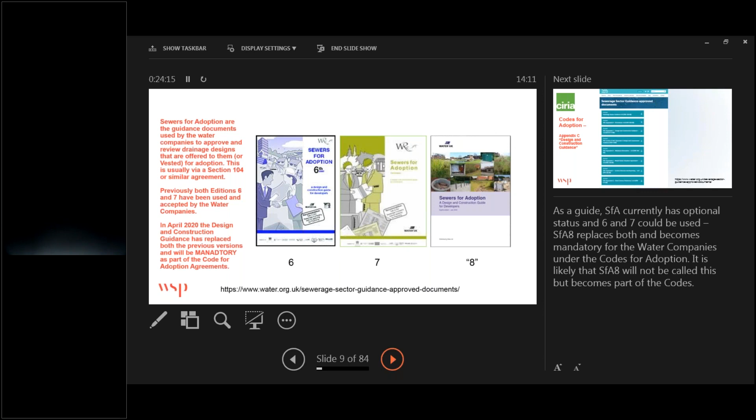If we go on to the next slide, sewerage sector guidance includes a whole raft of documents. The DCG, Design and Construction Guidance, is Appendix C of the suite of documents, and in particular we're concerning ourselves with Section C of Appendix C of the sewerage sector guidance. So there's quite a lot of background information beyond what we're talking about today. Next slide.

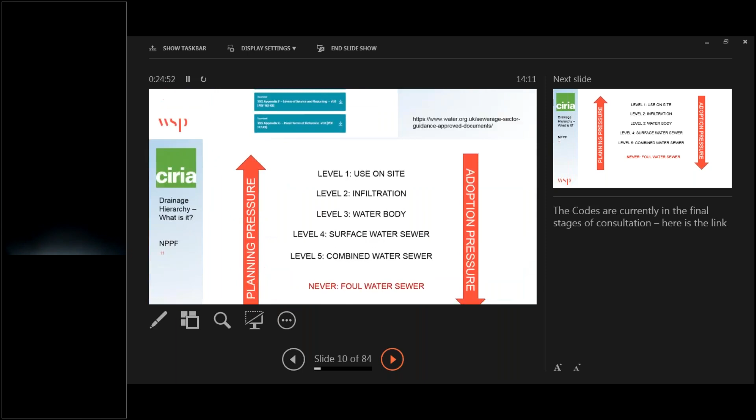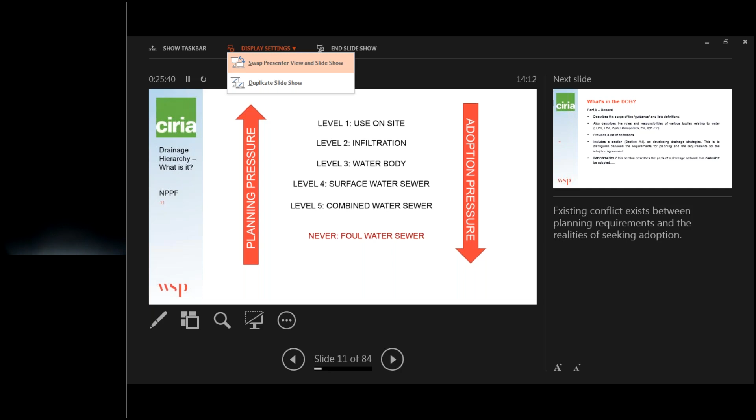What we've tended to have, because of the lack of Schedule 3 applying to England, is a mismatch between the NPPF and what planning is gearing itself to deliver on sites in terms of sustainable drainage, versus what can actually be achieved through adoption and agreements and divesting the assets. There's always been this two-way pressure: sustainable drainage leans towards reuse on site and source control, trying to keep the water close to where it falls and on the surface, whereas the adoption criteria, Sewers for Adoption 6, 7, has generally dealt with subsurface systems, generally pipe systems. So what we're trying to do now, and what the DCG has recognised, is that sustainable drainage should be part of that surface water management criteria.

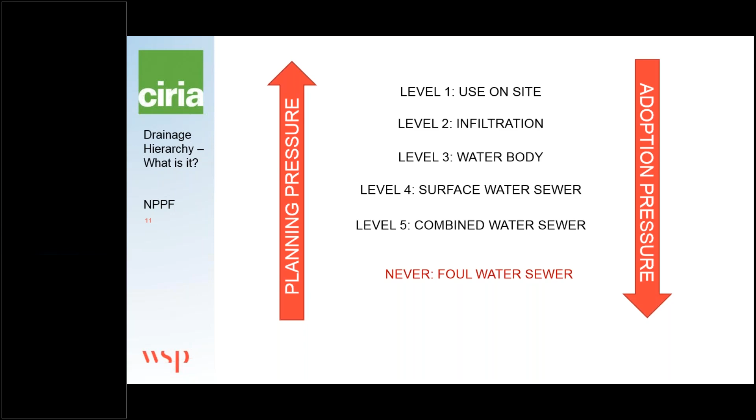So on the next slide, please. I'm going to jump through a few of the key headings that I've taken out of the DCG, just to give you a flavour of what's changed, and in particular how it's relevant to sustainable drainage.

One of the key aspects is that, unlike 6 and 7, the DCG is now going to be mandatory for all water companies. Some of you may not have been aware that 6 and 7 were still only guidance documents - they weren't necessarily mandatory, although they were probably applied in a mandatory way. The DCG is mandatory, but the process of offering your site for adoption is still the voluntary element. So there's still a gap there which we need to fill.

What the DCG starts to roll out is this idea of a collaborative approach to surface water management, and it sets out in Part A the collaborative roles of various entities, such as the lead local flood authority, the local planning authority, the water companies themselves, the Environment Agency, IDB, etc. It also stresses that the lead local flood authority may be the lead definer in some of the characteristics of the drainage network, rather than the water company side of things. So, for instance, the discharge rate from a site is more likely to be dictated by the lead local flood authority rather than as part of an adopting network system, and that's recognised within the DCG.

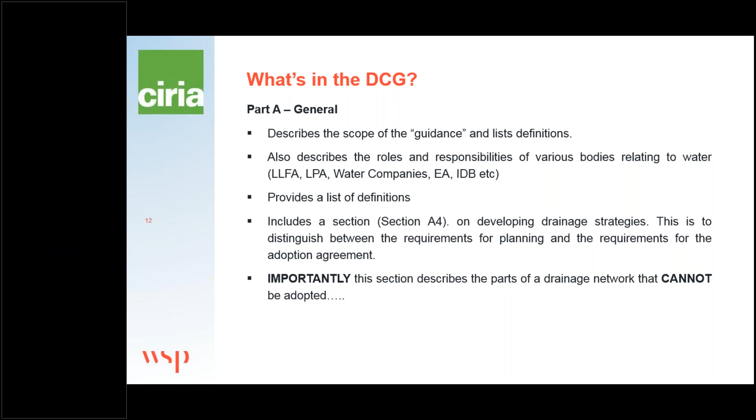One of the hurdles that had to be overcome quite early in the process of trying to look at sustainable drainage, in terms of what was originally Sewers for Adoption, was how can you define a SuDS element as a sewer. So what Water UK and all the partners were not going to do was redefine the definition of a sewer and change the legal definition within the Water Industry Act. It was a case of looking at SuDS elements in terms of how they can be applied or considered to be a sewer. This is quite important going through the whole DCG, as it gives you a framework, but it also highlights some of the potential limitations of what could be adopted.

So the next slide, please.

In line with the legislation and the historical context of the DCG, elements such as highway drainage are still the same as previous adoption criteria. So basically, the water company is not obliged to take on a purely highway drainage system. It's handled via agreements, and as many of you may know, it'll be through a Section 278 or Section 38 highways agreement that the highway drainage would be worked out, and that may connect to an adoptable drainage network but not be part of that network. Similarly, land drainage has never been a function of the water companies, and therefore, similar to groundwater, is something that is not normally permitted into a public sewer system.

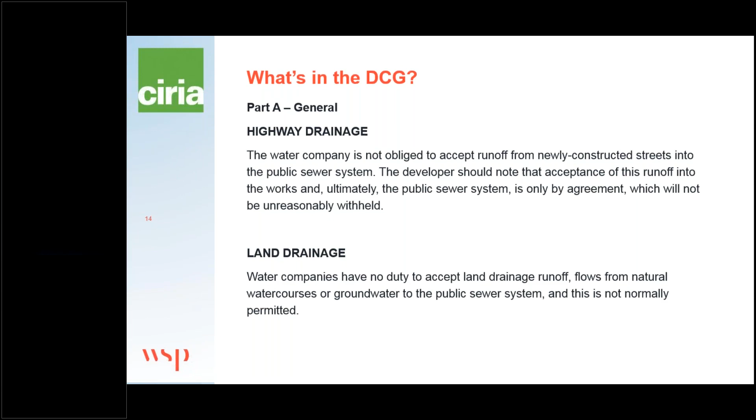In line with the definition of a sewer, there are essentially four components. One is that it has to drain buildings or the local hard-standing areas that go with those buildings. It has to have a defined channel that you can easily comprehend, not necessarily see, but at least know where it's going, its size in a way. It conveys and returns flows to a sewer, or to a surface water body, or it ultimately discharges to groundwater. And it has to have an effective point of discharge which has the lawful right to be there. For instance, you can't just discharge a pipe into a watercourse if you don't own that watercourse or have any rights to it. So these are the items that, to be a sewer, you must be able to tick off all of these going forward.

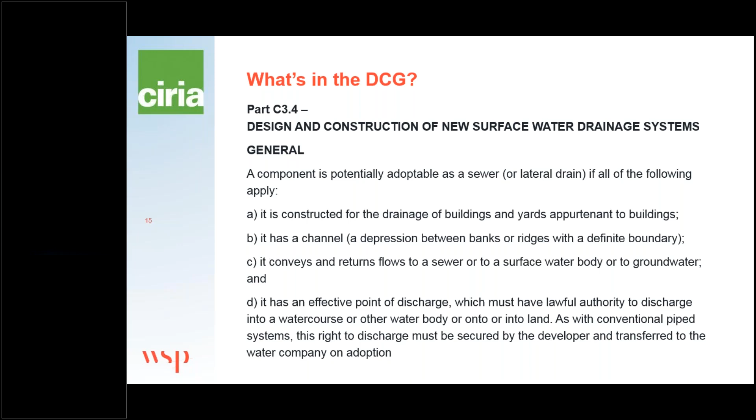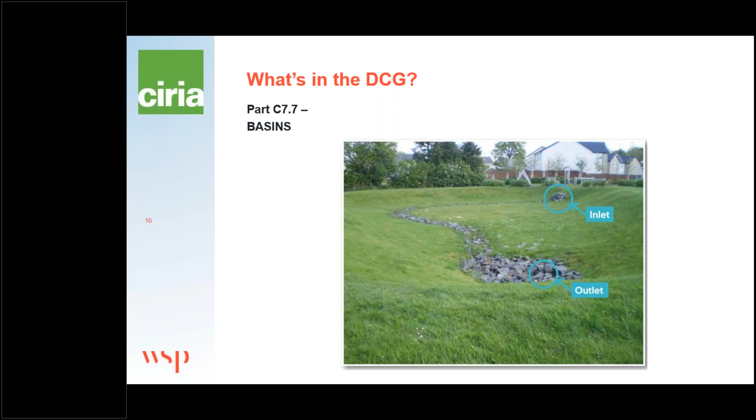Within the DCG there are a number of sections similar to Sewers for Adoption, and I've extracted this one, specific to basins. This is something new that a lot of you will find quite interesting, and I personally think it improves the way surface water is managed immensely compared to previous examples: basins can now be adopted in their entirety, including the inlets, outlets, flow controls, and the entire area of the basin where any storage above or below ground is contained. This is an important step change in sustainable drainage.

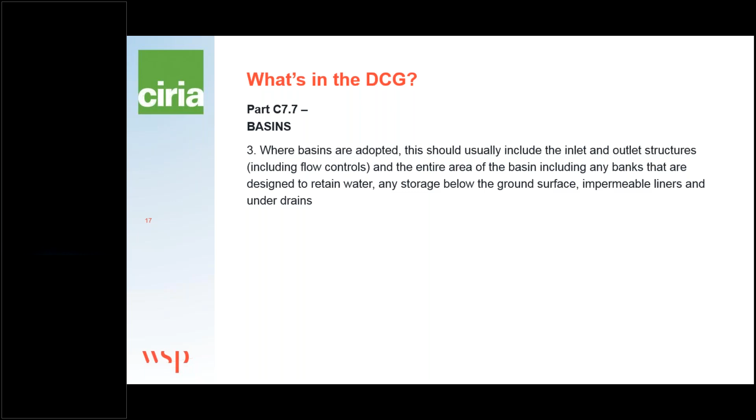As a quick example, many of you may have seen where basins were provided, but in an offline manner. In a Section 104 application, you may have shaded or applied for the adopted route to be, in a sense, a bypass of the basin, acting as the low flow route. Most low intensity storms would go through that network, and in some cases the network may even be designed for a 1 in 30 year event, meaning the basin is hardly ever used except for extreme events.

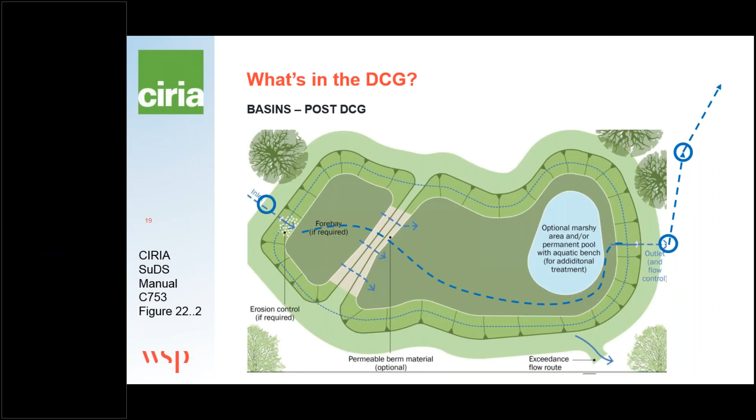What the DCG is now offering is that the basin becomes an integral part of the network, and you can now pass flows through it for every event. This means you can achieve interception volumes and water quality improvements on every single rainfall event. You get these losses in the system, improving downstream capacity issues, and making the most of the basin you've got in your network.

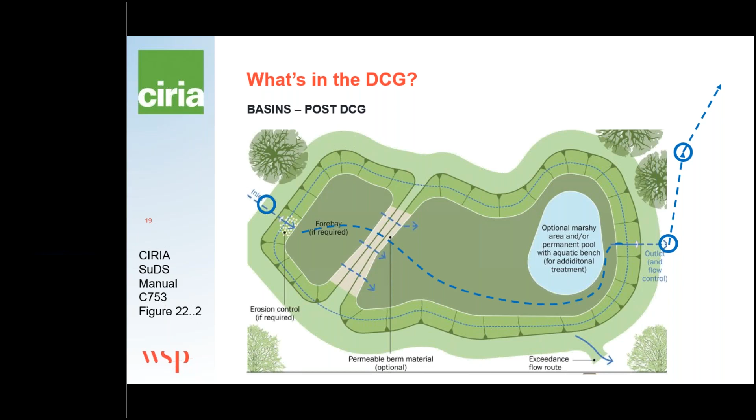There are components that cannot be adopted and fall outside of the SuDS definition, also listed in the DCG in line with previous definitions. Anything that is a watercourse as defined, including a main river, streams, or ordinary watercourses; anything mainly dealing with drainage of land or of a highway; anything to do with groundwater; and anything within a private curtilage, such as an individual property. Generally most of these have been similar in all previous incarnations of the DCG.

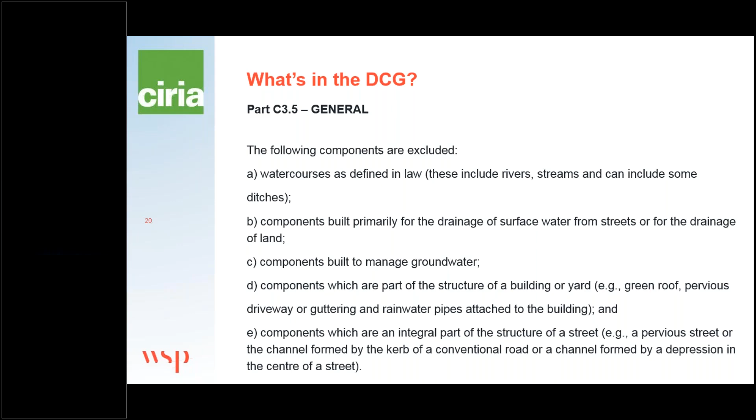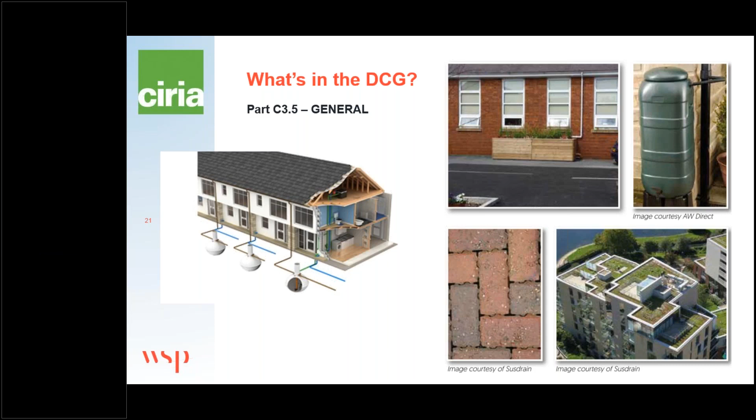These would typically be things that wouldn't be adopted: individual property level rainwater harvesting is not an adopted element, permeable paving as part of a highway is not adoptable, and green roofs as part of the building are generally not adoptable. So what I've done in the next couple of slides...

We're looking at all of the typical components you would think of as a SuDS component, and how those match the SuDS definition. One other thing to be aware of: the DCG now recognizes the planning requirement for the 1 in 100 year plus climate change as your design standard, another significant uplift in the design parameters, as well as things like urban creep. One thing to bear in mind is that the SuDS manual plays a very big part in the design criteria of the DCG, rather than the DCG replicating everything that's in the CIRIA manual.

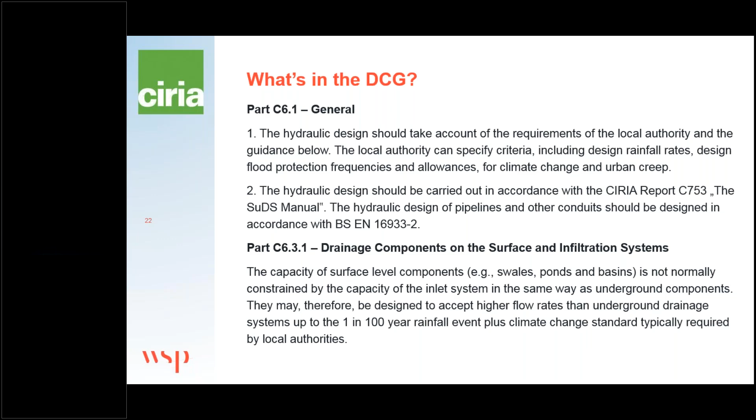I've particularly taken this clause out as well, because the DCG recognizes that all of the drainage components that you design have to work together. It's no good designing a subsurface system or a conveyance swale where the inlets to that swale have not got the capacity to allow the design event to reach that conveyance unit. So the DCG recognizes that, and I would stress to anybody designing drainage systems, that each component in the system has to be able to pass the water or retain the water in combination with the others.

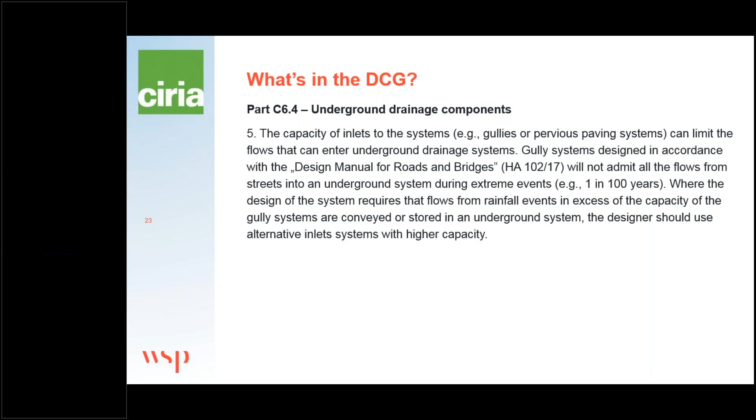Again, 1 in 100 year for everything, and it can be above or below ground.

I'll go quite quickly through this. This chart, although you probably can't see it because it's a bit fuzzy, is taken from the SuDS manual. It's a list of the main key SuDS components. So, on the next slide.

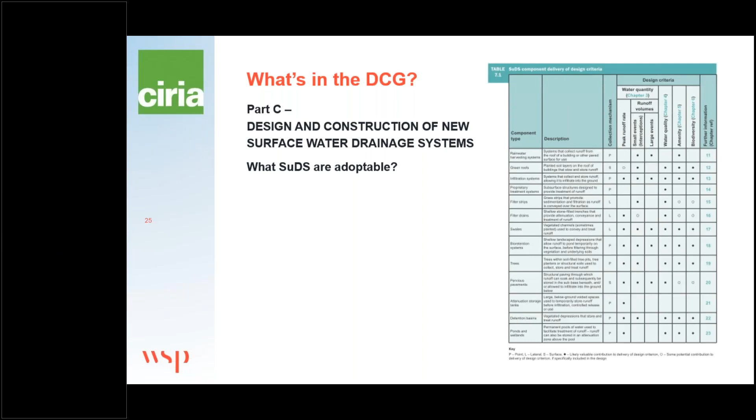If we look at each component, we start with rainwater harvesting systems. I would suggest to everybody that these would not normally fall under the adoption criteria, along with green roofs. Now, infiltration systems fall under the adoptable criteria, along with proprietary treatment systems.

Filter strips, which are generally the flatter sort of landscape grassed areas where water is passed across in a laminar flow, don't meet the criteria of a sewer and wouldn't normally be considered for adoption. Filter drains would be, along with swales and rills, depending on the contribution from highways. Bioretention systems, which could include rain gardens etc., similarly depend on the highway contribution.

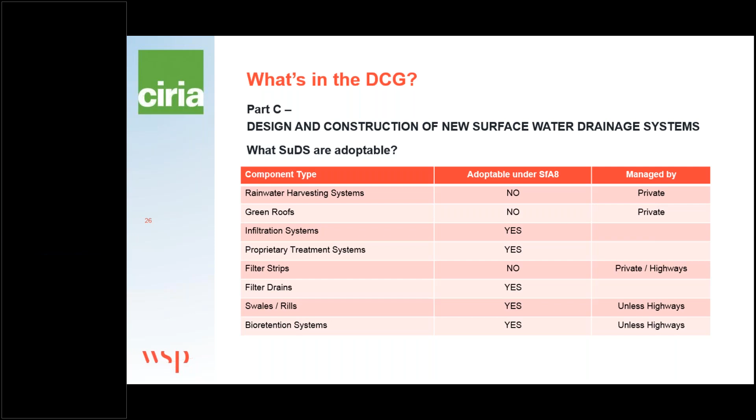Trees are listed in the SuDS manuals. On their own, I can't really see that being a part of an adoptable network, but certainly in combination with other features, that would be.

Pervious pavements, as I said before, are a highway feature and therefore not an adopted sewer element, but attenuation tanks, detention basins, ponds, and wetlands can all now be under this definition of a sewer and therefore can become intrinsically part of the adopted network. Next slide.

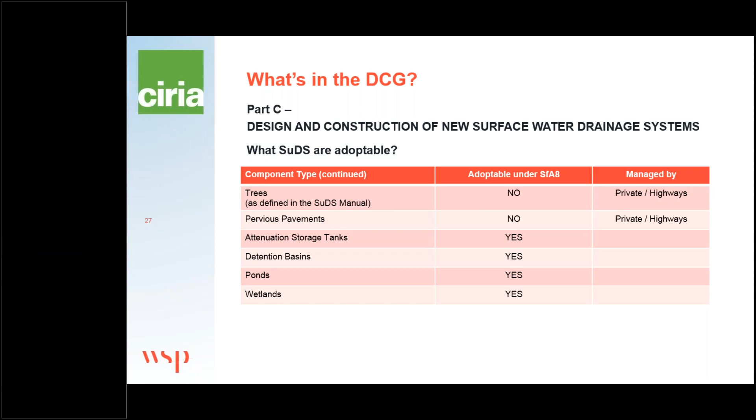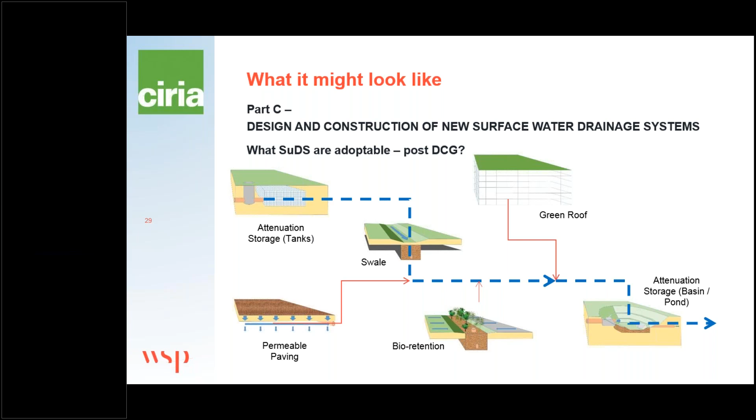What we can now do is link up these elements to an adopted system, which provides the added benefit of treatment, water quality, amenity, biodiversity, but also allows these components to work for the majority of rainfall events, and not just for the extreme one that is typically designed for.

So in summary, the DCG is a big step change in the application of adoption criteria to SuDS. It doesn't replace Schedule 3, but it does go a long way in promoting sustainable drainage as per the requirements of NPPG and various other planning-led documents. But we have to bear in mind that it can only work within the parameters of the definitions of a sewer.

If you can't define it as a sewer, or you can't define the input parameters as being mainly related to buildings, then you may need to look at your design parameters and the adoption criteria going forward. That, I think, is the end of my little section.

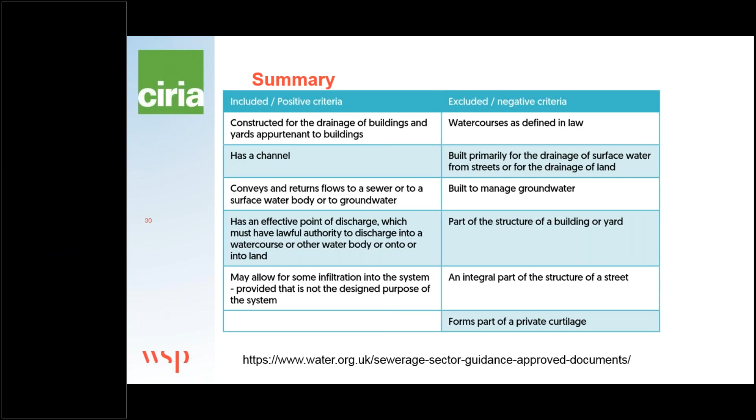The last thing I'd like to say is, as Louise said at the beginning, the DCG now came into force on April 1st this year. It is mandatory if you are offering stuff for adoption, but it has been recognised that there will always have to be a transition period where applications have gone in before April, or just after the beginning of April, where previous standards can be applied.

At the moment, it's looking like applications made after 1st of October would need to be DCG compliant rather than sewers for adoption compliant. There may be some review on that because of the current COVID issues, but generally that's the sort of time frame for any of your applications.

I've taken this from the Anglian Water one, so it may be that as this goes forward, what we're going to see is more perhaps area bespoke guidance, which goes beyond DCG, because there are no actual diagrams like this within the DCG for SuDS components. This may be something that gets a bit more emphasis going forward.

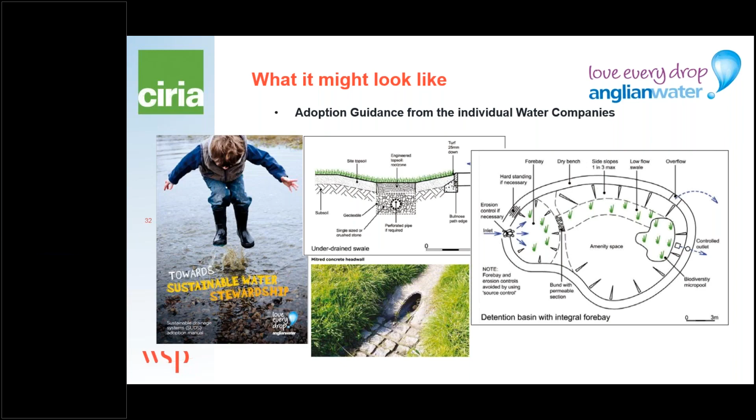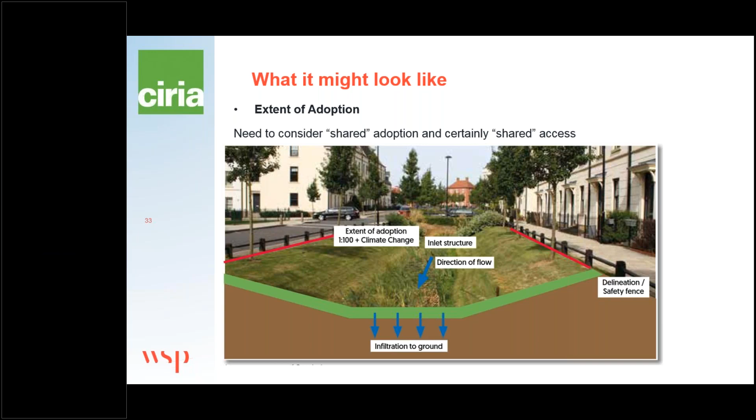Similarly, this is a similar structure, but in a bit more of an open space area, where the red line is not so definitive as being a fence or an edging of anything, but that element becomes the adopted sewer within an open space area.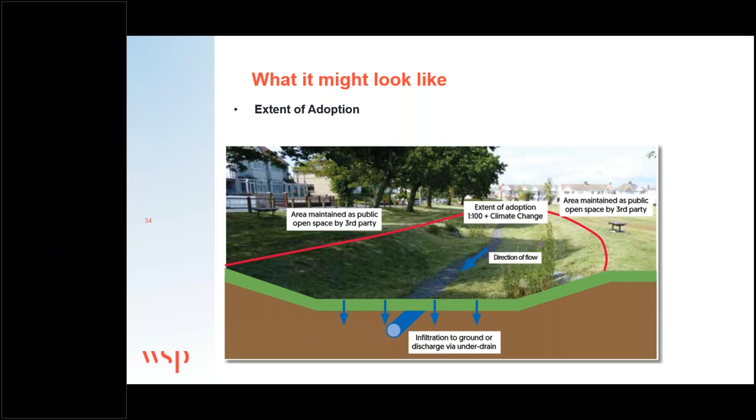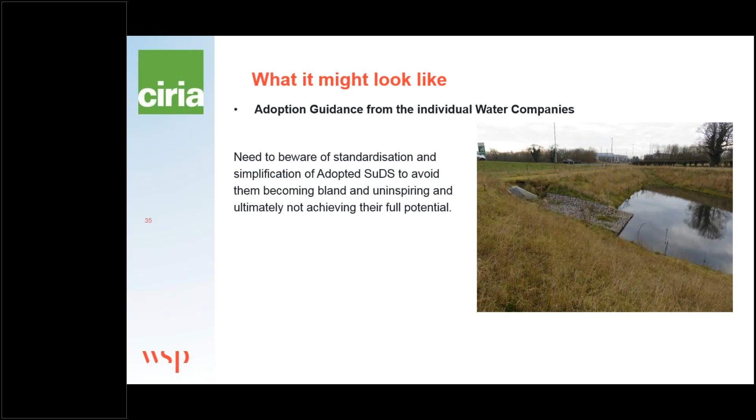So as a final point, I'd like to say, hopefully what we can see is an imaginative approach to sustainable drainage and adopted systems, and that we don't get locked into a standardization of everything and a simplification. The next couple of speakers will then talk about how we can build on that. So next slide, please.

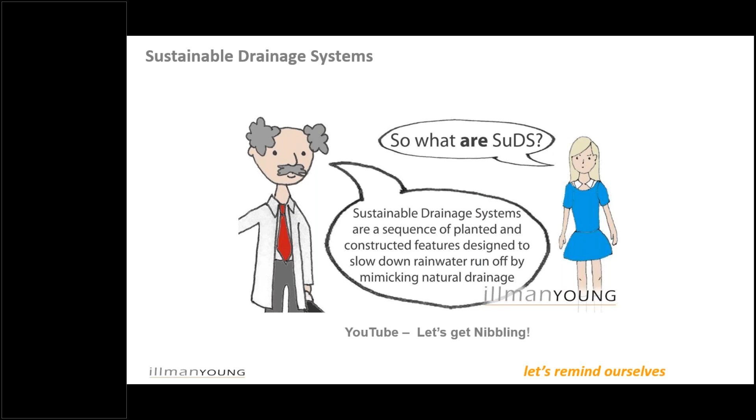Okay, so why do we want to do it? Really, what good looks like is when we can deliver all of these multiple benefits. You'll have seen these comparative diagrams talking about conventional drainage systems, which are designed to predominantly manage quantity, may do some quality, not much amenity, and pretty much no biodiversity. Whereas what we're looking for in designing and implementing SuDS systems is to get some measure of equality between managing quantity, improving water quality, looking at how we can improve or even add biodiversity, and at the same time provide places for people to enjoy through their amenity.

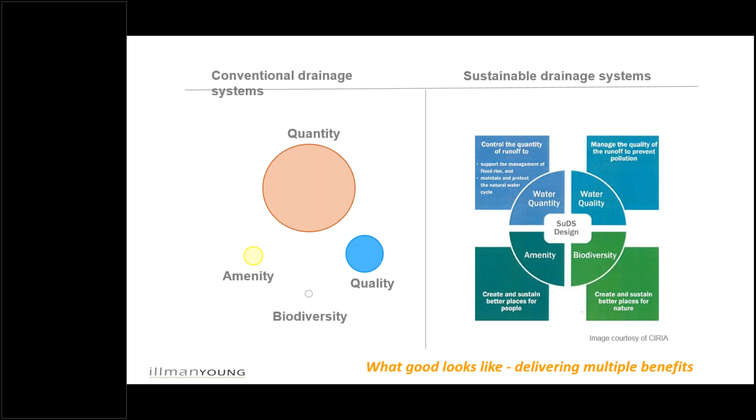Next slide please. But one of the problems we have is that many approaches to SuDS we've seen over recent years are still acting like conventional drainage systems, even though they're being produced on the basis that they're SuDS. That's the approach that says let's do a pipe down to some underground storage unit or oversized pipes, and then discharge that into something that's supposed to be a pond but may in fact just be a bomb crater - that is not delivering what we were looking to achieve by looking at the 4 pillars of SuDS. Now there is absolutely a place for all of those underground systems, they're absolutely a necessity in some instances. The issue is where we have schemes that have the ability to have SuDS integrated within them in a more holistic manner, those opportunities are not being taken, and even when they are taken, even if it was adequate in design, that's not being delivered in construction.

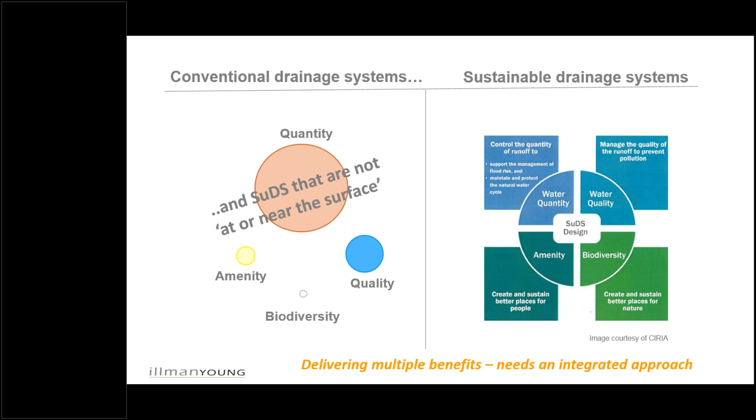So what I want to do now is whip you through a scheme we've worked on to demonstrate the way integrated design can work and how that can look to deliver multiple benefits. Because when we talk about integrated design, an awful lot of people don't really understand what that means in an approach to site design. But where you have comprehensive design teams working on projects where you can get input from all of those involved, what you're trying to do is maximise the benefits for all aspects of that scheme. This will be a really quick whip through, because I'm not trying to teach you about integrated design, I'm just trying to explain an approach so you can see how we get to the end solution. So we're going to go through this fairly fast. Let's start with the first one, please.

Okay, so there we go. There's a site boundary, a piece of green space in the middle of a developed area, and we're looking to see how development, water management and other factors can be integrated from its first stages.

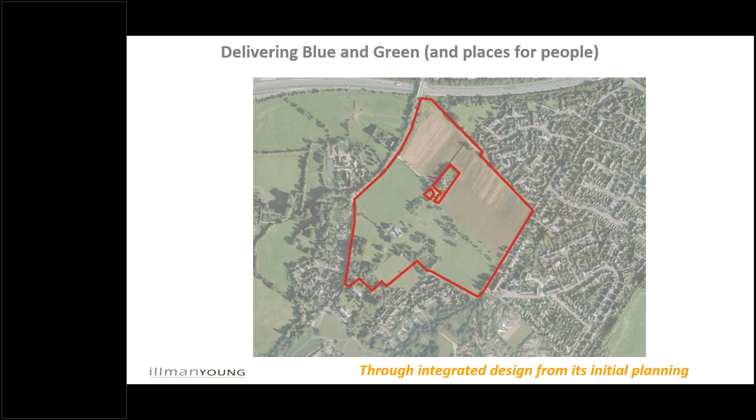This is going to be quick, so I need my team to be quick. So what is it that we need to consider? Well, absolutely first, the baseline issues. Right at the top, does it flood, and how and where will it drain?

But then we've got to look at all these other factors: topography, local landscape character, the historic context, the visual issues arising from the development, and then the resource on site, whether that's ecological or the trees. There may be other factors depending on the site, but those are the ones relevant to this particular site.

And why are we wanting to do it? Well, because we want to make it a livable, attractive place for people to be. So what we want to do is deliver positive placemaking to make it fit within the character of that area, an attractive place for people to live, providing all the necessary functional things about access and connections, and provision for play, public space and amenity more generally.

Okay, so looking at the flooding first, this site had substantial areas sitting in flood zone 2, which clearly we needed to understand and address, and use as a constraint to the developable area.

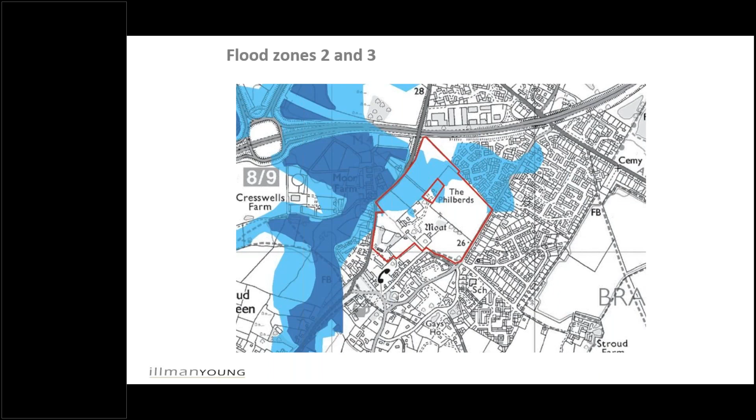We were interested in the historic context. There had been a building on the site, long since demolished, but we had the remnants of a historic landscape, and there's an old water tower on that, which is a locally listed building. There's also the designation of a conservation area next to it, which we also had to respect.

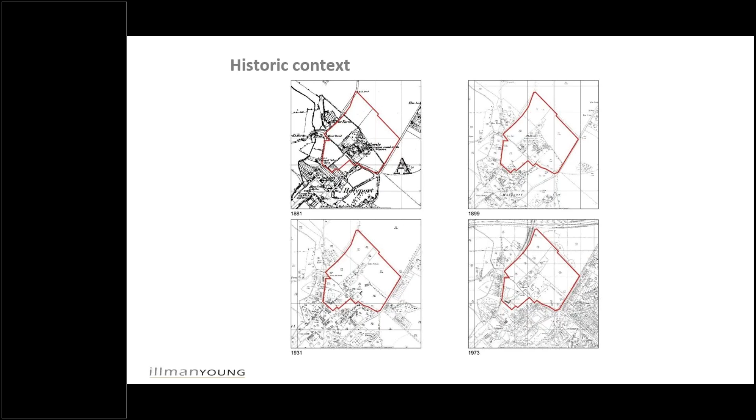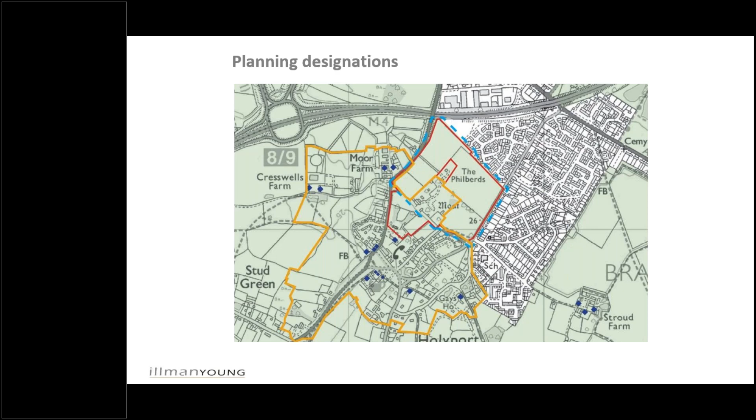So we're looking at the visual issues - how the site was seen from the access roads along the northeast, northwestern and southeastern boundaries, what you saw into the site, how housing might be assimilated within it, so those aspects, particularly from the north which had a much more rural quality, were maintained in how the development was sited, its height and location. From the southern side, how that was integrated within the urban form of the existing area.

And understanding this local landscape character, and how the new landscape we'd be creating around this site could very much have part of the feel and understanding that it belonged to this part of the country, and wasn't just some random approach to landscape around the periphery.

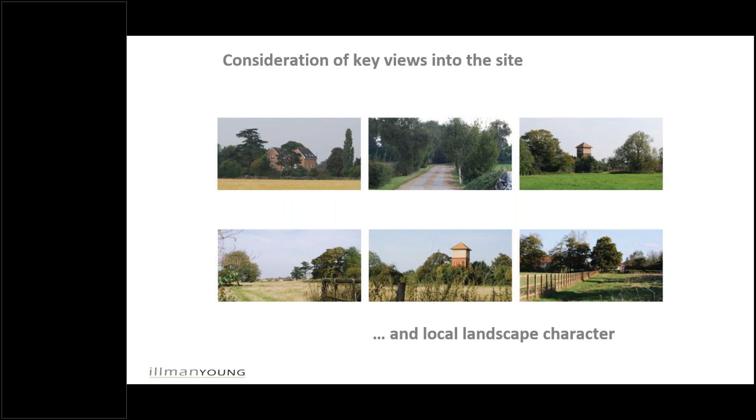And indeed, what were important views into the site, as perceived by the people that lived there. So there was and is a landscape resource on that site, mainly centred in the central section - majority of the trees not of great quality, some remnant orchards from its earlier heyday, but it gave us a bit of a framework and something to consider as to what would be coming back to that site.

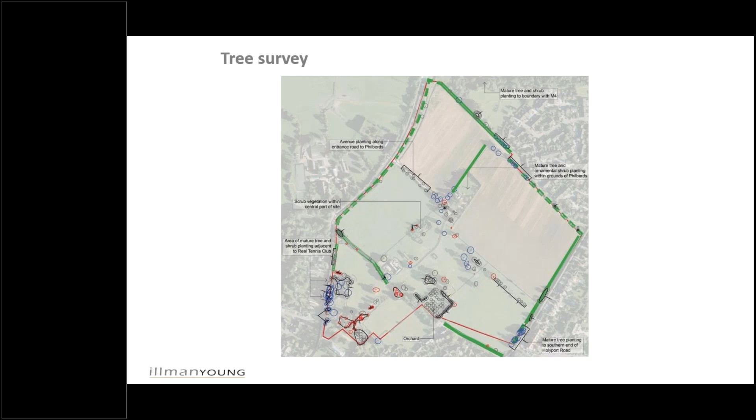So that's starting to pull it together in terms of the constraints as to what was going to form the developable area, and what area was left, and how that might have a positive use in the ultimate design of the scheme, to make this whole piece of land meaningful and useful to the people that were going to be there.

Clearly, the areas that flood were very important in determining that. The access points for vehicles from the northwest and the southeast, and then pedestrian routings from the adjacent spaces into it, and relating also how we connected with the housing, the shopping and the schools generally around that.

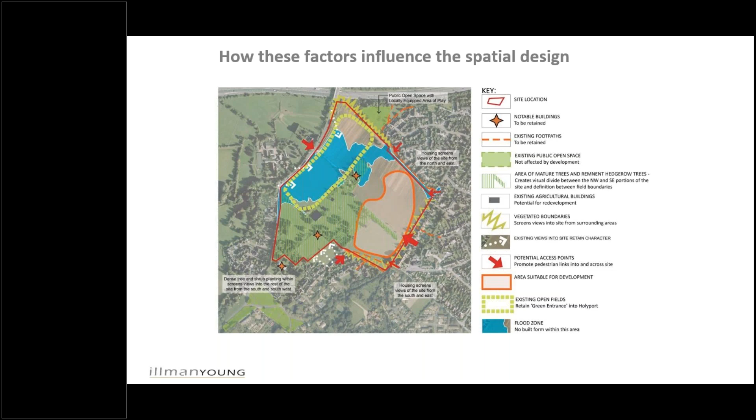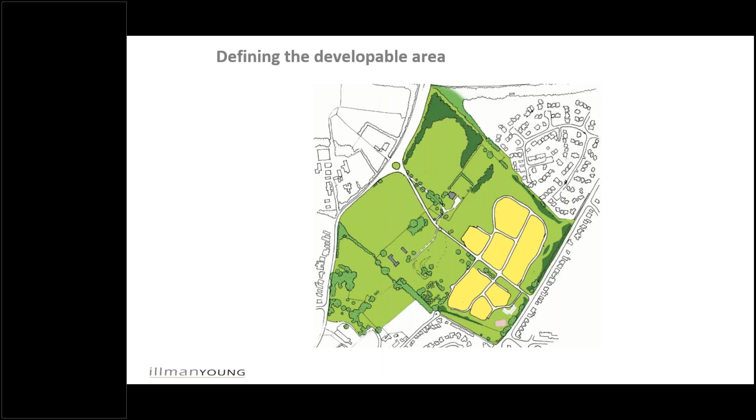So that's starting to form the developable area and how the urban form for that might work, and how that was going to then sit and relate to the landscape within which it sat and that beyond.

Next, taking that a step further to look at access and movement, whether for vehicles or pedestrian routes, and how we connected in, how it did at the moment, and how we could improve connections—creating footpath routes through to the edge of the site to connect to the local primary school and local shops. Also thinking about leisure activities and how that land might be used as part of a wider network of usage across the site.

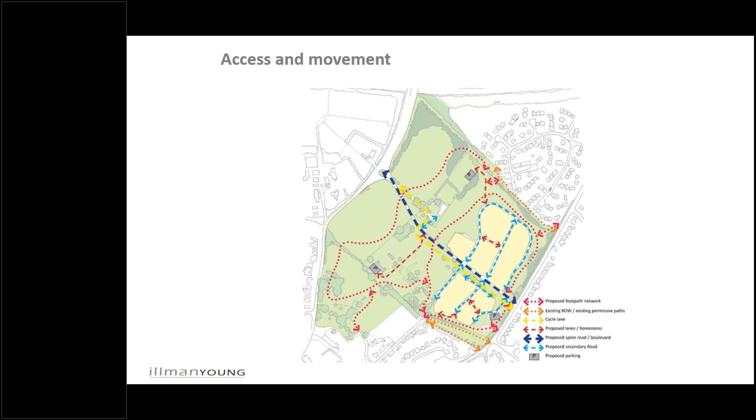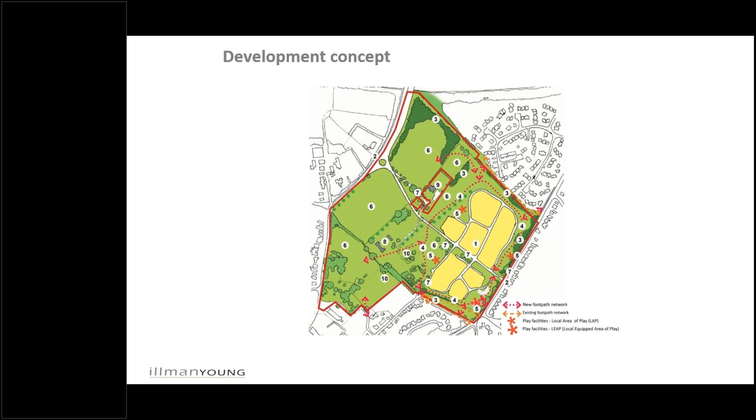So putting that together, you can start to see this is now really shaping where features in the site might be placed, how we're going to manage that, and get those connections to actually work in the more detailed design aspects of it.

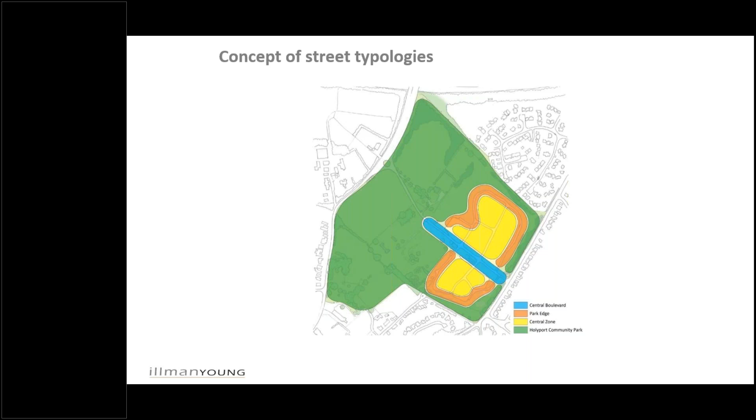Then looking at the street typologies, there were three we came up with: the central boulevard, which picked up on some of the existing trees in the old access route; the park edge around the boundary; and the central main town zones, which were yellow.

I've twisted that round a bit so you can see how that works and the extent of those. This is where we were considering how the SuDS integration might work. This is an area with good infiltration, so we know we can provide for that, providing we've got enough space around the site to enable it. That was a key part in the design of the road network and understanding where we wanted that water to go.

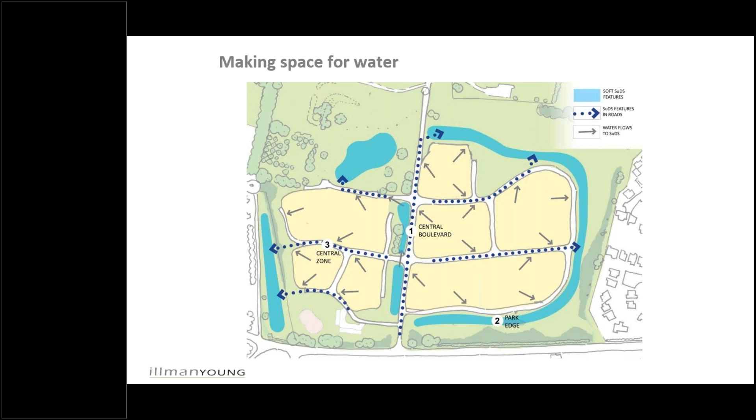So we're now just going to look at that in a bit more detail.

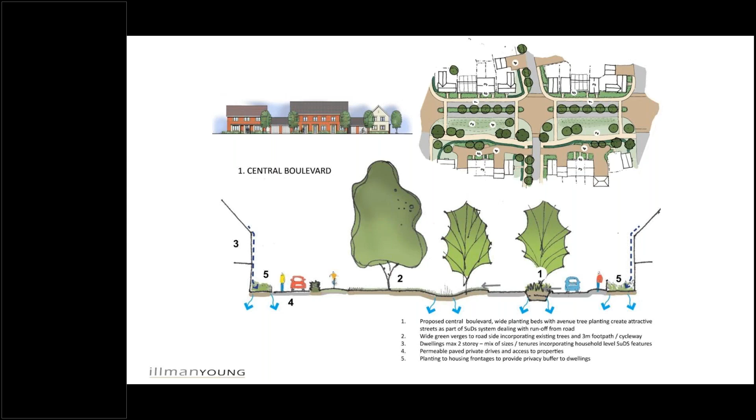This was the central boulevard—tree number 2 is part of the existing tree. It was about giving width to that central boulevard to make an important feature out of this historic access into the site, and to build upon that by pulling the housing apart, allowing space to integrate the SuDS features as part of this avenue approach, giving a real context, setting and character to the housing fronting onto it on both sides.

Along the park edge, all of these houses were looking out over green space around the access road. Looking at how water from the houses could be managed through the footpaths and probably quite small front gardens, and how the roads could then be taken onto the space around the boundaries, the park edge, forming part of that landscape. As part of that, integrating not only biodiversity within things like bioretention planters and swales, but also beyond into creating usable space that might be more highly managed, with greater biodiversity beyond—all working together to create a landscape relevant to this estate.

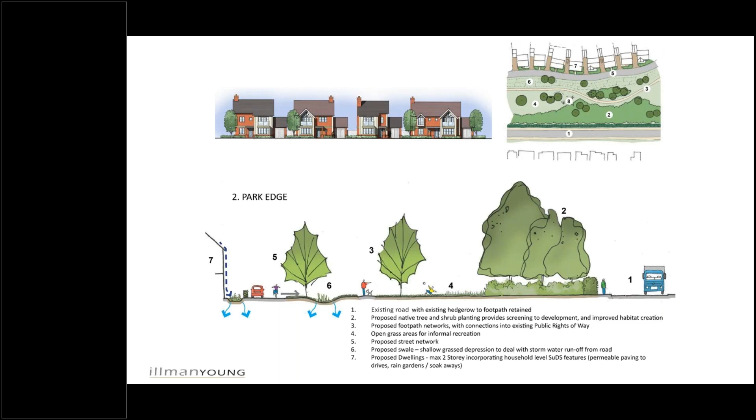And the third one, in the central zone—this is more intensely developed, but again specifically using permeable paving, bioretention planters, rainwater harvesting, and the fact that in the rear gardens we have the ability to infiltrate directly into them. So that could all be planned in, in principle.

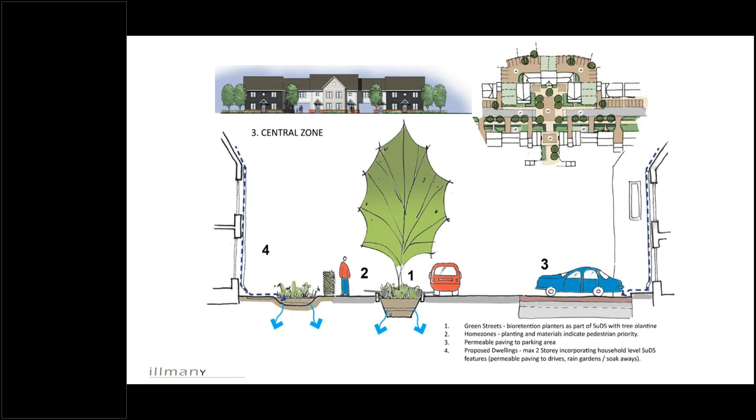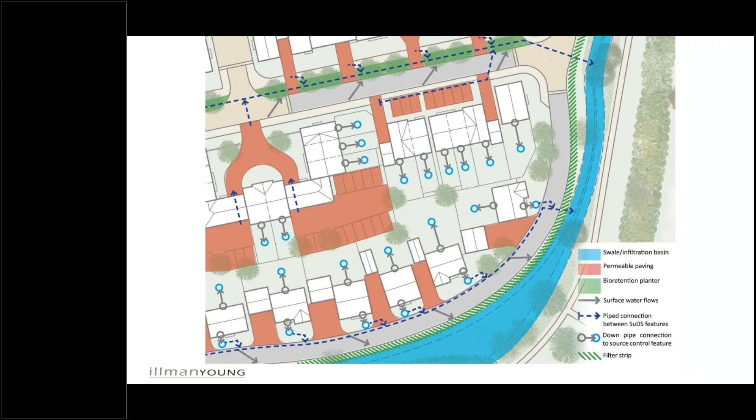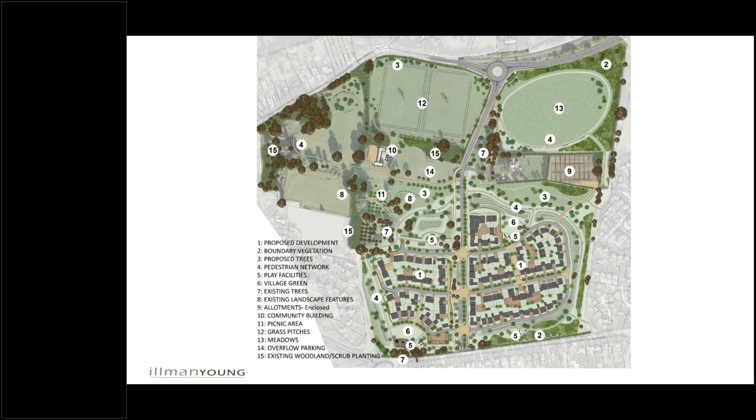And that's the overall master plan—something that has SuDS and the landscape structure and usable spaces totally integrated throughout its whole conception, from beginning to the finalisation of the master plan. So that's what, as landscape architects, we mean when we talk about integrated design.

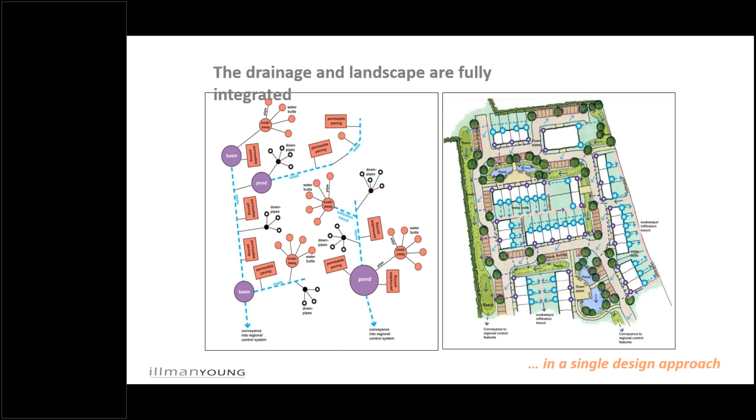Next, please. Okay, so getting onto the DCG. How can the DCG help us looking at SuDS integration?

That's not a problem. Filter strips, at the end of the day, are just strips of mown grass, so I'm not particularly bothered about that. Tree pit SuDS on their own are going to be in urban areas, specifically in hard paving. Again, I'm not worried about those.

The only unfortunate thing perhaps is the pervious paving. But in reality, all of the other range of SuDS that are at or near the surface are available to us as design tools in doing these schemes. So there seems to me to be little restriction on our ability to use SuDS systems in this integrated way.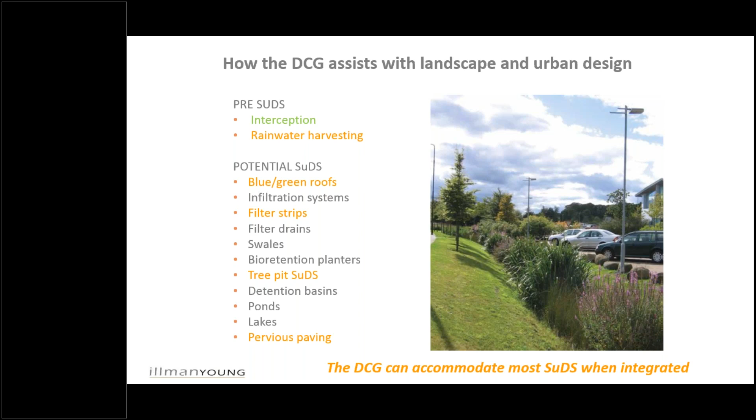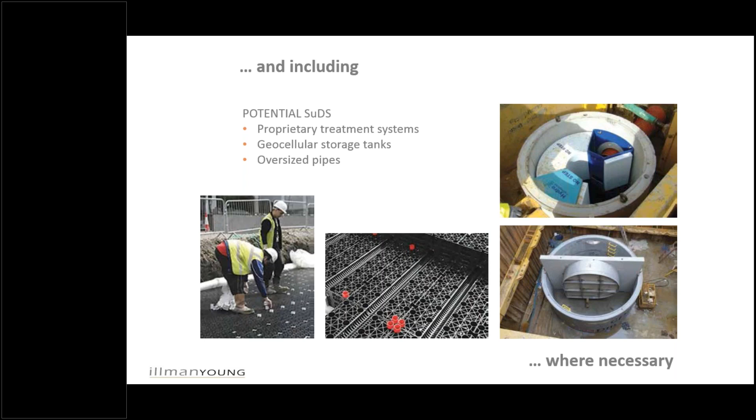Next, please. The DCG is actually very accommodating in that respect. Clearly, we do need underground treatment systems or proprietary treatment systems in circumstances where space or other reasons dictate that. But in the main, the standard surface SuDS are really all available to us to use in terms of adoption through the DCG. Next, please.

So going back to the multifunctional benefits, if we look at it, we can do all of these things, because the point is to achieve a sense of equality between quality, quantity, amenity and biodiversity. We want to deliver attractive, healthy places that are relevant, with the right resilience, that won't flood, that might use rainwater effectively. That's not within the DCG, but it's still an objective for us in the design, to enhance and improve water quality and the aquatic environment, and at the same time create integrated new habitats and networks and healthier environments.

The way this can be achieved through the DCG, because the DCG can't do it all, we can't expect it to, and it won't. We also have a problem in that using the 4 pillars of SuDS in an integrated fashion is not mandatory. But through the route of them being available for adoption, the role of water companies in having scrutiny, involvement from even the pre-app stage, through the planning process, through conditions, and through working with developers on site to ensure what is built is correct and in accordance with guidance, then that route to adoption is now open and clear.

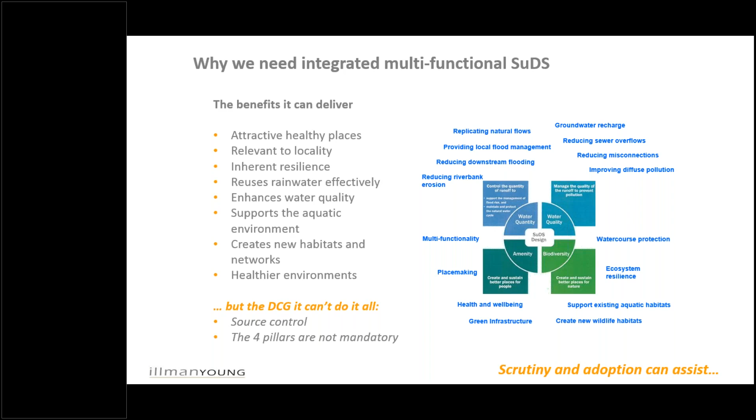Because we do have SuDS on the surface, and some of them look like this - and this is absolutely not what we want. Steep-sided, potentially dangerous, and downright ugly. These are not necessary. If water companies are involved, their involvement can help ensure that schemes coming for adoption don't end up looking like this.

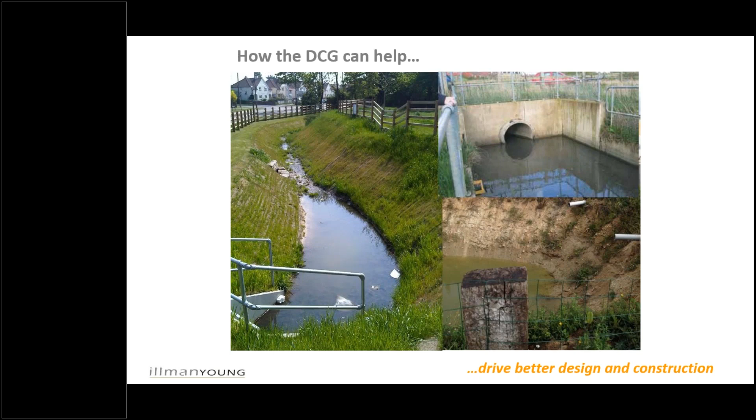Next, please. Driving better design and construction. So what needs to change? Well, in a way quite a lot, but they're not massive steps. So everybody has a role, a change in what they do and the way that they do it.

From the point of view of developers, I think they really need to understand the potential of SuDS to deliver nicer and better places, better integrated with the design, and what that can do to enhance their developments. They can then see that it's important to seize that opportunity to maximise the benefits, because in doing so, they're definitely going to maximise the saleability of their new housing, or make them easier to sell. They're going to have an easier passage through the planning process if they can start ticking all these other boxes, as an inherent part of what they're doing.

At the same time, they can endeavour to design out potentially costly problems by addressing them sooner. Because if you integrate it from the outset, you're not trying to retrofit something into a new build scheme, which is just a silly way of doing it and likely to be difficult and costly, ending up in underground systems because you just haven't really thought that through.

From the point of view of lead local flood authorities, what we need to see change is for them to be enabled to demand more than just volume management from developers, and we're definitely moving in that direction, and also to create much more positive partnerships to help deliver these broader water management objectives. A lot of LLFAs do endeavour to do that, but they're not really fully enabled at the moment by policy.

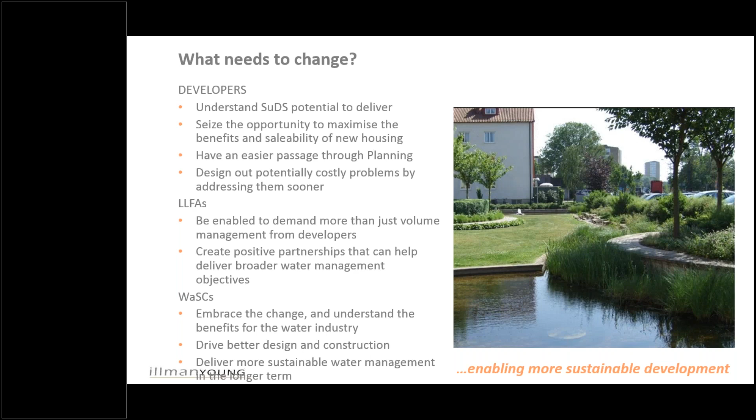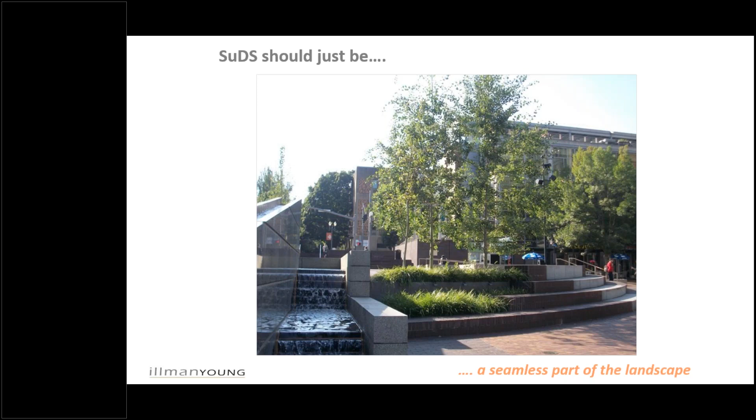Because actually, SuDS should just be a seamless part of the landscape, integrated as business as usual. And that's really what we're hoping to see, that we move towards that more from the DCG. And that's my last slide. Thank you.

So I'm here today from United Utilities to talk about some aspirations for SuDS and the DCG, following on from Chris and Sue's brilliant presentations. Thanks to CIRIA as well for inviting me to be part of this.

Next slide, please. As a SuDS manager at United Utilities, the purpose of this slide is just to give you a bit of an introduction to how I fit into the business. I actually work within our wastewater network team, but I do have dotted line management across a lot of the business, so I work very closely with developer services, as well as engaging with engineering and our environment and asset strategy teams.

We've acknowledged in the presentations given earlier that the delivery of SuDS is a process that involves multiple stakeholders and bodies. So I've also got quite close relationships with our external partners and stakeholders. One way of that is through our Northwest Regional Flood and Coastal Committee. We've got a SuDS task and finish group, so I engage with them in that way.

So my role, I'm the focal point manager and technical lead for SuDS, managing and ensuring the provision of expert and specialist services to wastewater network and the wider business, and making sure that our activities comply with our legislative and regulatory obligations. So making sure fundamentally that SuDS are installed effectively as part of our asset base, whether that's through third parties, developers, or ourselves in retrofit projects, and working with our construction delivery partners and engineering teams for anything on capital projects, as well as things like, in terms of our asset management, actually sponsoring the SuDS maintenance strategy.

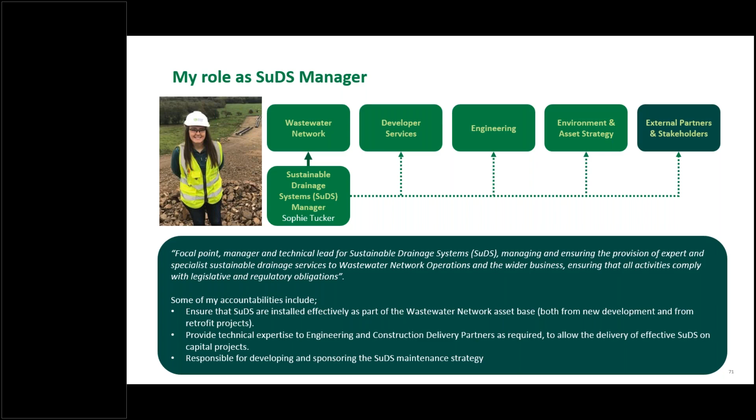Next slide, please. So in terms of United Utilities, we are the North West Water and Wastewater Company, which means it's our job to keep the taps flowing and the toilets flushing for 3 million homes and 200,000 businesses across our region. So in doing that, there is a lot of ground to cover to deliver a reliable service to our customers. And fundamentally, the part that I play within the business is around sustainable drainage. So within that, we've got to recognise the area that we serve.

So we've got 7 million household customers, and only 3.4 million of them are in employment. I must state that this was, prior to COVID, these statistics. There were 650,000 that received benefit, and a large proportion on universal credit.

So when we think of the content that Sue's just covered in her slides, SuDS do make sense. They deliver a significant amount of value, above just drainage and that function. Through Water UK, the water and sewage companies, we have a public interest commitment, because we acknowledge that water companies play a unique role in running a vital public service for public good, and we need to do more to meet the high expectations which rightly come with that role. But we've also had feedback from our regulator, Ofwat, where they're saying water companies can't just continue to build their way out of trouble.

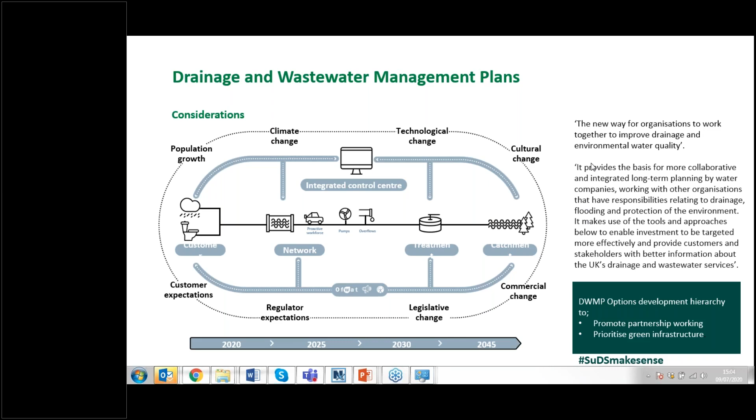Next slide, please. Yeah, so in terms of the DCG, which there's been a lot of talk about this today, it does provide a mechanism for adoption, which historically has been perceived as a barrier to the delivery of SuDS. As Chris mentioned, the sewerage sector guidance is regulated sector guidance, whereas sewers for adoption had voluntary status. So this is now something that's regulated by Ofwat. It's good that it has driven consistency amongst the water companies in terms of the standards that we're working to.

But we've already talked about that, yeah, really positive step forward, but it is SuDS as sewers. So we've got to recognise that there are some limitations with that. However, there are now a range of SuDS components that can be compliant with the legal definition of a sewer and therefore considered for adoption, which ideally should lead to better managed and integrated surface water systems. So fundamentally, we want to facilitate the delivery of high quality SuDS through the planning process. And the DCG, which refers designers to the CIRIA SuDS manual, is an enabler of this.

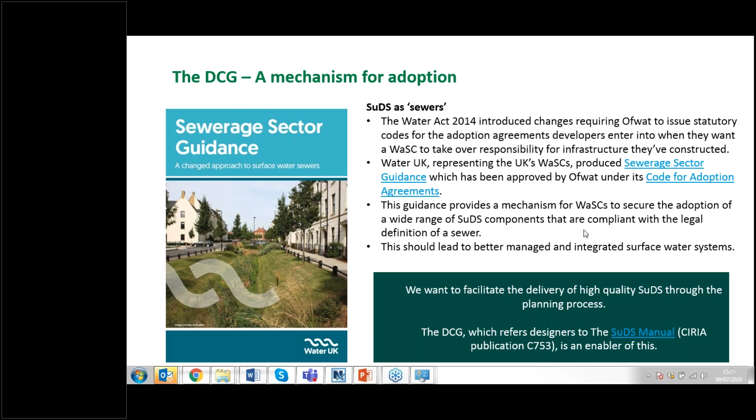So basically, it's trying to demonstrate that the earlier engagement and the earlier opportunity you've got to influence potentially can have a greater effect on the outcome.

So we recognise that we are reviewing how we can do more to get involved earlier. We offer a free pre-development inquiry service, and we proactively engage in the planning process and system. We've always been a statutory consultee in the preparation of local plans, but more recently we're engaging with partners, for example the Greater Manchester Combined Authority, to see how at that land allocation stage we can try and get people to understand the baseline condition of a site, the constraints, and all those other factors Sue talked about, to try and get that expectation setting at the earliest opportunity, which ideally would drive the right level of design, which could also be offered for adoption to the water and sewerage company.

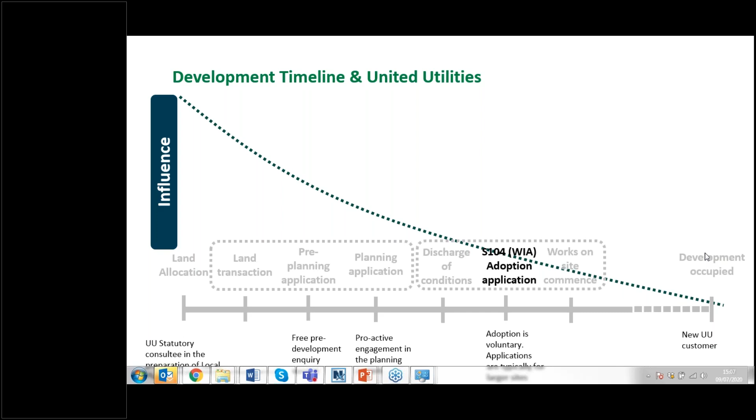In terms of my reaction to the DCG, it's only been in place since it came into effect the 1st of April, so just over a few months now. But the Section 104 adoption process of conventional drainage using sewers for adoption was arguably quite prescriptive. It was quite clear whether it was compliant, yes or no.

However, the approach the DCG takes with regards to SuDS design does reference the SuDS manual, rightly so, and we want the design to be informed by the site characteristics, considering the natural flow paths and discharge points. But you can argue with that.

Certainly some conversations I've got into, we're finding it's a little bit subjective, because people are perhaps interpreting the guidance in a different way.

So what I am finding is I've had a lot of conversations where, because it references that the maximum slope should not exceed 1 in 3, people are thinking they comply with the guidance if they provide a 1 in 3 slope around the entire perimeter. But what the guidance also says is that it needs to appear natural, it needs to be integrated, and you won't find natural features out there with angular corners or a 1 in 3 slope consistently around the feature. So it just needs more thought there.

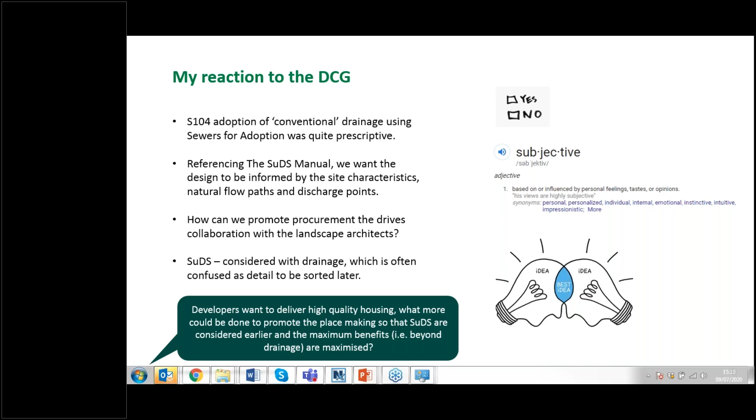So in terms of some considerations, the shape doesn't appear natural, there's limited flow path length, and the way it is, it's clearly susceptible to premature silting.

There's little or no amenity biodiversity benefit. And you could argue, has the exceedance path been fully considered with the electrical equipment in the pump station compound adjacent? Again, health and safety—it's in the corner of the site, only overlooked by one property, with fencing around the whole feature. It's located between a dwelling and a pumping station. If it was better integrated within the site layout, you wouldn't be coming across this. But this is an example where perhaps they've established a housing layout first, and then tried to fit in some attenuation within that. So it's just, again, how do we do things earlier to avoid this type of scenario?

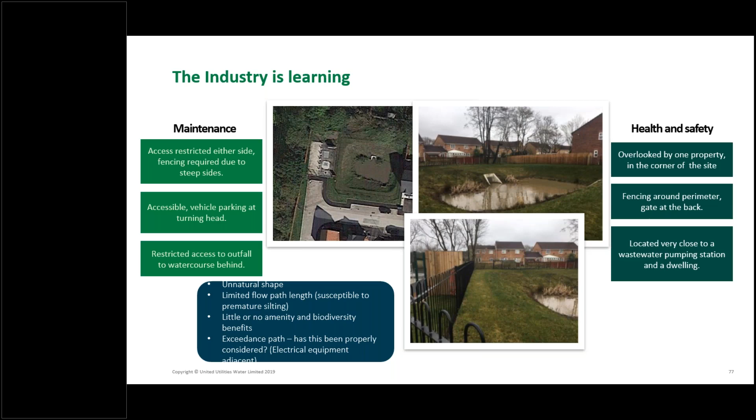But I can't reinforce it enough—to deliver high quality multifunctional SuDS, the procurement process needs to drive that collaboration with the landscape architects to work closely with the drainage engineer.

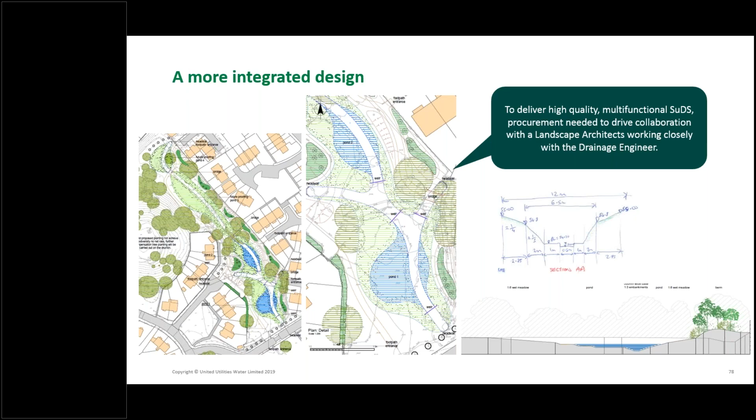In terms of, just to summarise, some anecdotal observations. I'll reiterate, we're only about 3 months in since it's been brought into play, but these anecdotes are quite typical of a lot of submissions. So designs are typically end of pipe attenuation, and that's leading to deeper components. When you think of a conventional drainage system that starts with needing 1.2 metres cover in the road, and then the pipework's laid at a self-cleansing gradient, what you're finding is by the time it gets to a surface level component, it is really deep, and it's not great in terms of the design.

So actually what we'd like to see more of is how do we change that approach to really drive more surface level conveyance, whether that be integrated close to the highway as some of those images show, or whether that be in more of a public open space depending on the type of development. We'd like to see less use of angular shapes and corners, and avoid that single gradient—actually try and mimic a natural feature. It shouldn't really look man-made.

And then really the product specified should be appropriate. We've had cases where the fencing around certain components is paladin fencing, which is typically that used for pumping stations. Is that really appropriate when you're trying to drive it as an amenity value? No, it's not. But actually it is because of the design, perhaps it's somewhat unsafe—it needs to be segregated. So that's why, how can we do it earlier to really integrate it into better design?

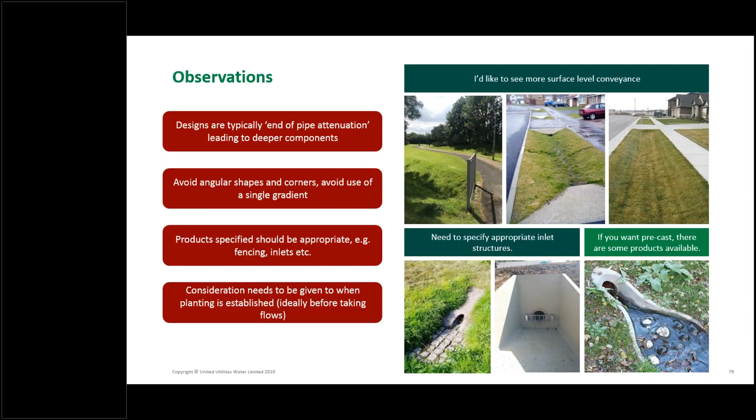I'll just read it out to you. The SuDS design principles proposed by Illman Young rely on SuDS having first call on space, but central government is pushing for high density and developers' profits arise from maximum housing numbers. So we just aren't seeing responsible and creative SuDS solutions. How could planning authorities, lead local flood authorities and water companies press for a change in priorities at national level?

I think there's two answers to that, really. I think the first one is that, yes, I totally agree that density can and will be an issue. And that's why I put in that second little example very briefly to show a much more dense arrangement, and therefore how it could be done with less space for that particular design.

But also bear in mind that in planning policies, and particularly through local plans, what you are going to have is open space requirements. So there's quite a lot of standards around that actually says how much public open space there must be relative to the number of dwellings that are provided, and similarly the walk distance that there may be to, say, local play facilities. So there's a range of different types of play facilities at different scales, and there's that ability through the local planning policies which will put on the interpretation of national guidance into how it's delivered locally to actually have these spatial requirements for open space.